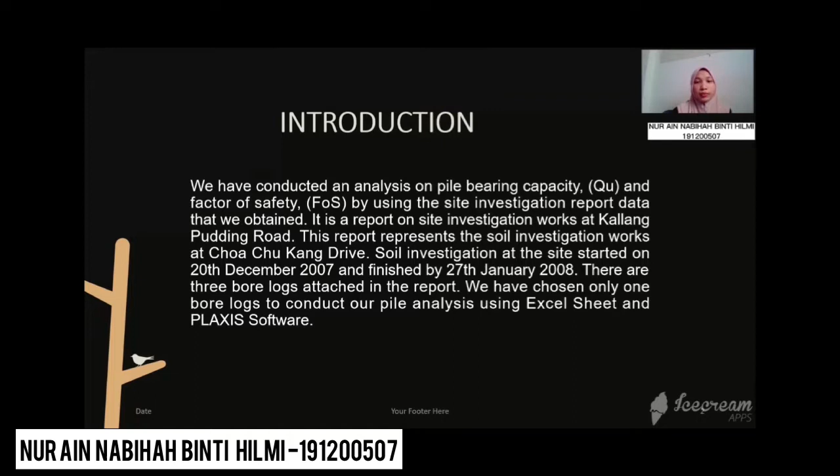Objective. Our aim in conducting this pile analysis is to explore and utilize our site investigation data in order to find pile bearing capacity and factor of safety.

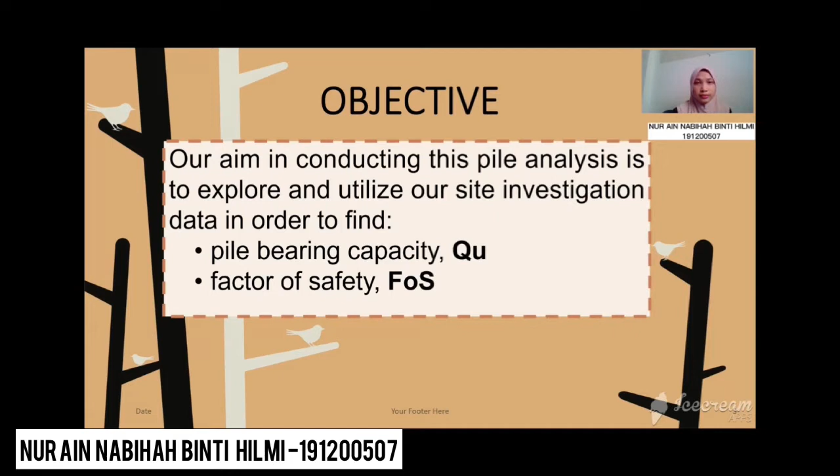Equipments. There are 2 software we use in this analysis, which is Excel sheet and Plaxis software. The reason we use this software is because it is easy to use and accurate.

Plaxis is the leading geotechnical engineering simulation software developed specifically for deformation analysis of soil and rock. Renowned for ease of use and accuracy, it helps us optimize our design more effectively than applying traditional conservative calculation methods.

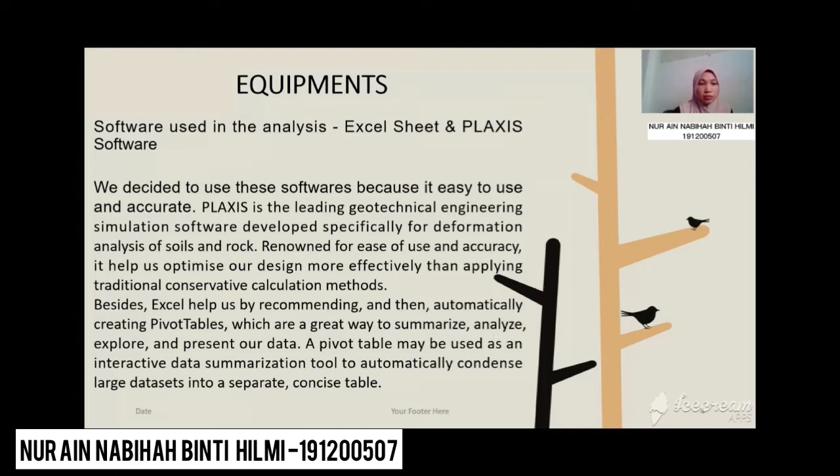Besides, Excel helps us by recommending and automatically creating pivot tables, which are a great way to summarize, analyze, explore, and present our data. A pivot table may be used as an interactive data summarization tool to automatically condense a large dataset into a separate concise table.

For manual calculation, in order to find Q ultimate, we are using the Meyerhof method in SPT. But first, we need to know the value of N60 so that we can substitute it into the Meyerhof equation in order to find QP.

The fav value for the high displacement driven pile also needs to be calculated. Then the value of end bearing capacity QP can be calculated using step 6. Then the shaft friction QS and the end bearing capacity QP can finally be calculated in order to find the Q ultimate.

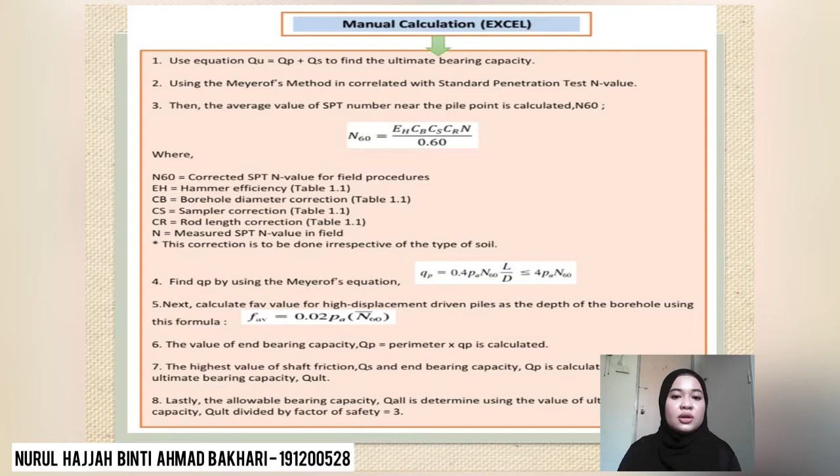The Q allowable, Q all, can also be determined by dividing the value of Q ultimate by the factor of safety, which is equal to 3.

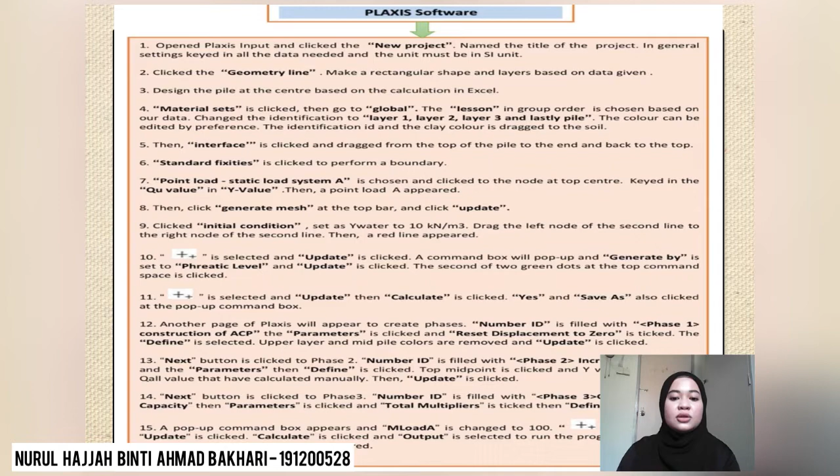Next, we apply initial conditions and update the calculation. Define groundwater level and define phases so that we can generate the mesh. Then apply load at the nodal point so that we can analyze the result, and the result will come out.

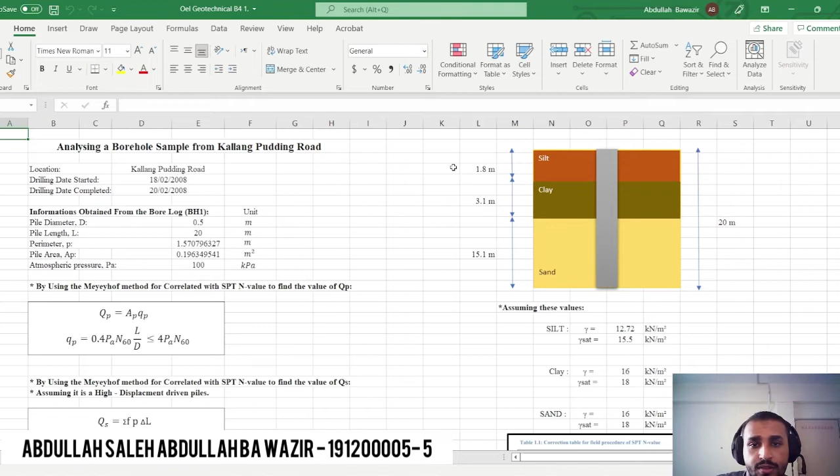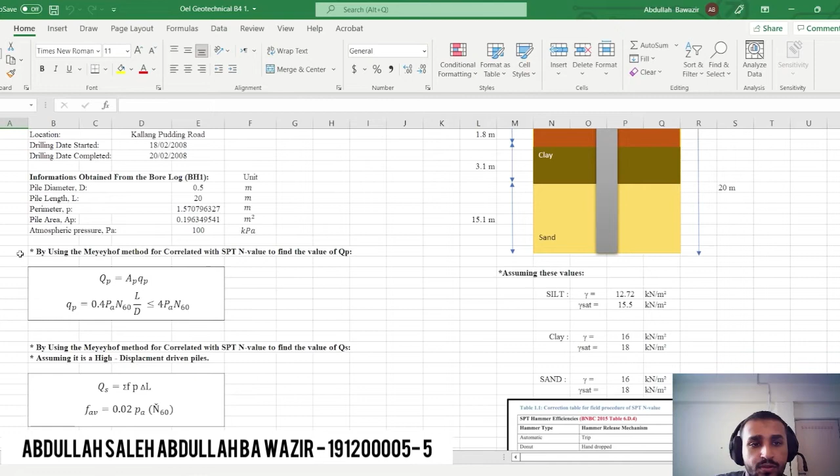And here's the parameter of our soil based on the SI report. Based on the data given, we need to use the Meyerhof method correlated with SPT N value. Here is the formula, and this is for QP.

And for QS, we will use the same Meyerhof method with SPT N value. This is the formula. Here is the formula for finding N60 and N corrected 60.

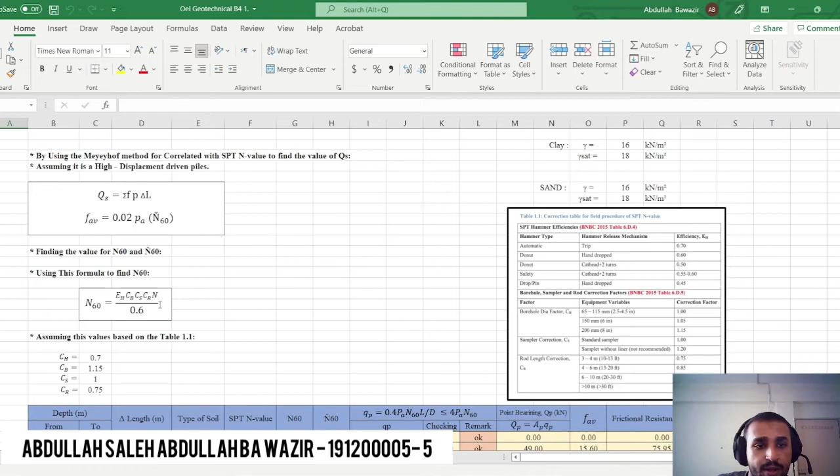And for the above value, we assume it here based on this table 1.1. After that, we plug all the formulas into this table for depth, the different layers and type of soil, SPT N value, N60, and N corrected 60.

We found here, we do the checking. Suppose this one to be bigger, then all of it is okay. And we found the value for qp and F average, and after that we found the frictional resistance, and here the ultimate bearing capacity.

Based on this, for the total point bearing capacity, we get it from this one, and for QS from here. For Q ultimate we will plus this value and this value. And after that, for factor of safety of 3, we just divide this one by 3, and we will get this value.

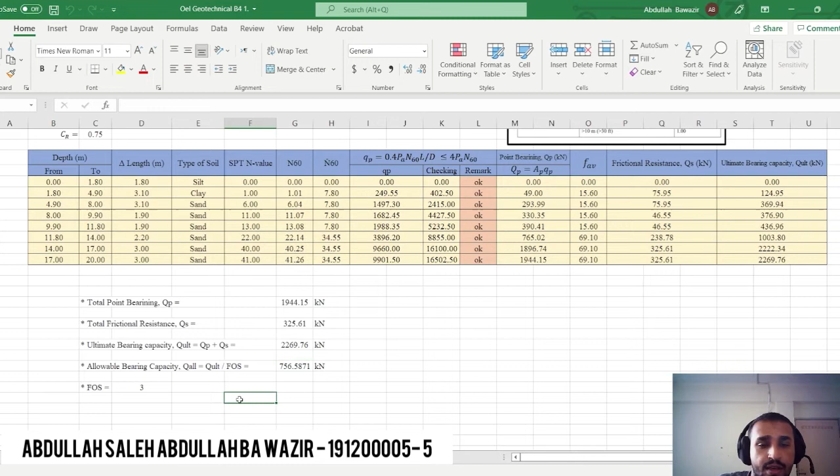Hi everyone. Today we are going to talk about the Plaxis analysis.

Currently, we are using Plaxis 2D to analyze the pile bearing capacity QU. Plaxis 2D is a geotechnical analysis software which can be used to determine the total displacement, effective stress, total stress, and so on for the soil. But today we are focused on the pile bearing capacity.

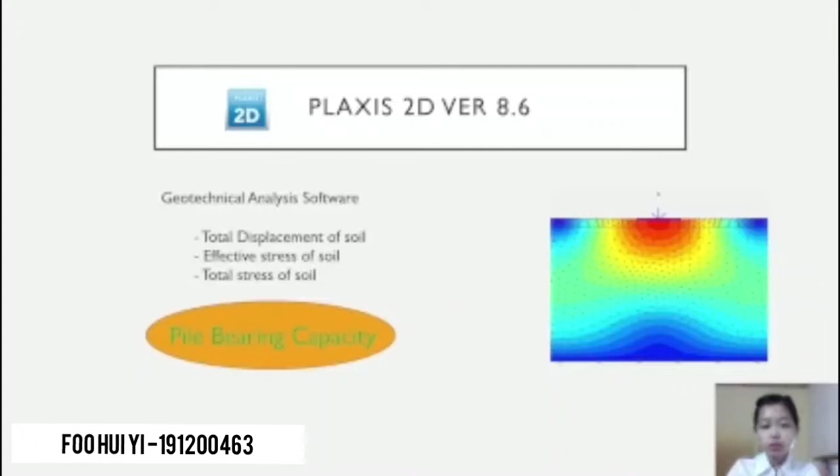First, we need to draw the model of the pile and divide the soil into several layers as shown in the figure, based on our SI report.

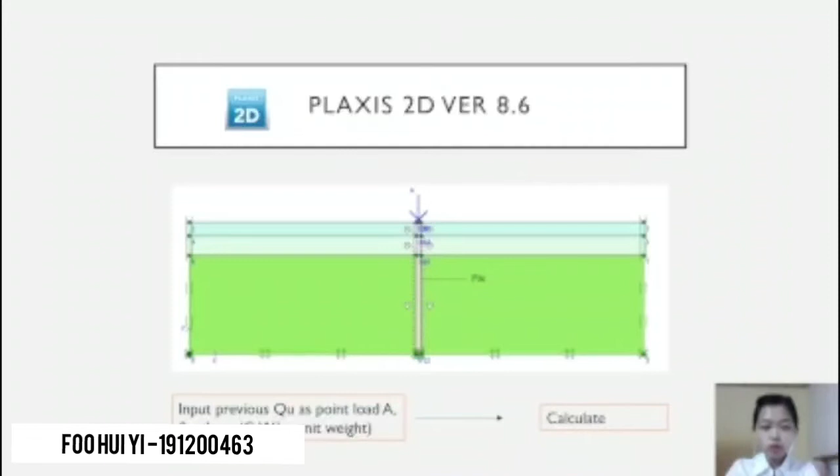Next, we need to input the estimated bearing capacity value from previous manual calculations and other required components such as groundwater level, unit weight of soil, and so on. After that, we start to calculate.

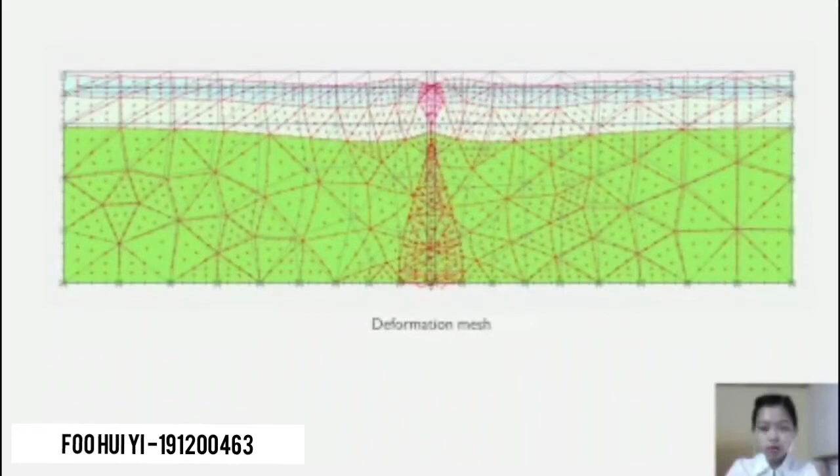By generating the deformation mesh, it shows the deformation that occurs due to the reaction and soil stress in the soil, as shown in the figure.

Besides that, we can also find the total stress reacted on the pile, as shown. If you are not satisfied, you may refer to the table to check the stress at a particular point.

In our analysis, we trace the vertical total stress, sigma yy, from the soil at the bottom of the pile and multiply it with the affected area of the pile to obtain the point bearing capacity QP.

Meanwhile, we trace the horizontal total stress, sigma xx, from the soil at different layers reacted onto the pile, multiplied by the affected area of the pile separately for different layers, to obtain the frictional resistance Qs.

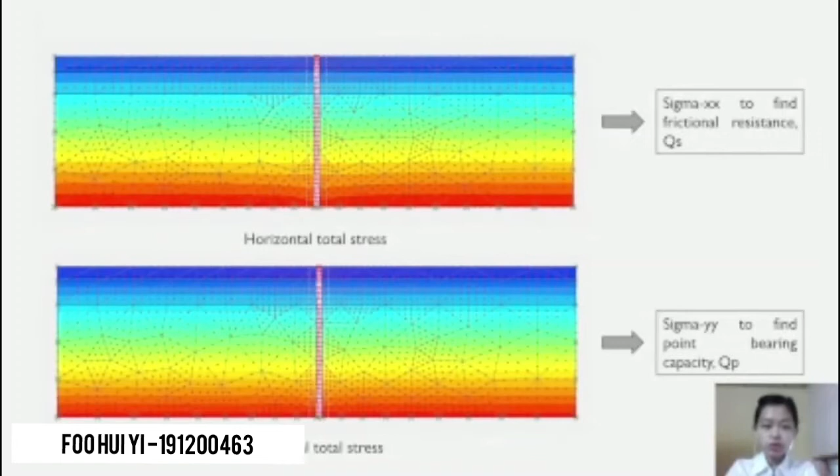This is the flow of the whole calculation. So after we obtain the Qs and Qp, we sum up the values of Qp and Qs to obtain the pile bearing capacity Qu. That's all for the analysis.

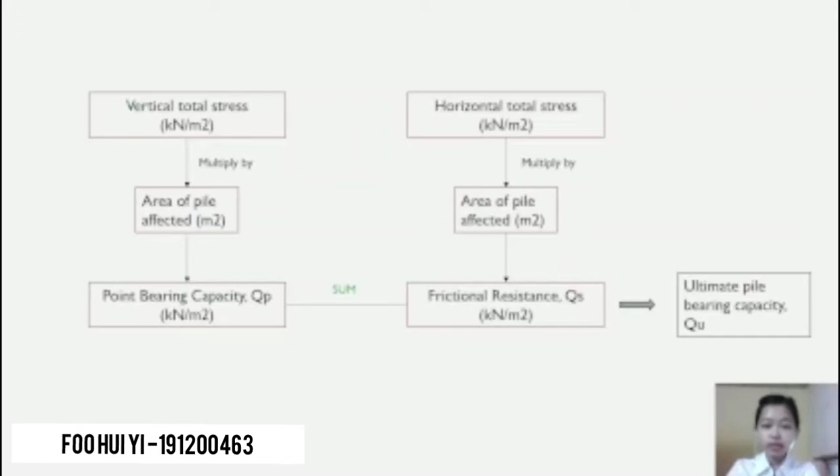Today I want to present about the result and the discussion.

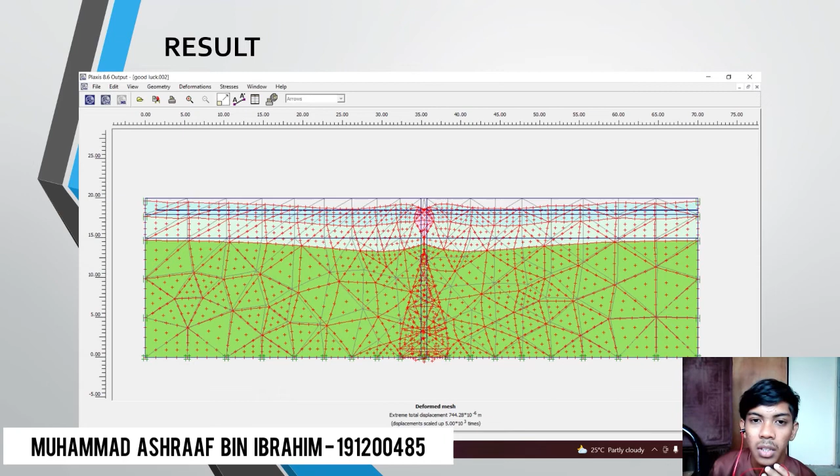In the discussion, we can determine that the soil contains silt, clay and sand at a depth of 20 meters, based on data from the SI report in the borehole log.

We can retrieve the results of the deformation of soil, total stress, total strain, and other factors involved in pile and foundation building utilizing Plaxis software.

The overall displacement for the pile is 744.28 times 10 to the power of negative 6 from the surface, according to our distorted mesh result.

As a result, the pile was deep due to soil that could not sustain the complete bearing capacity applied to the pile, and the sand was also too soft for the pile.

The total stress around the pile was the highest, particularly at the lowest part.

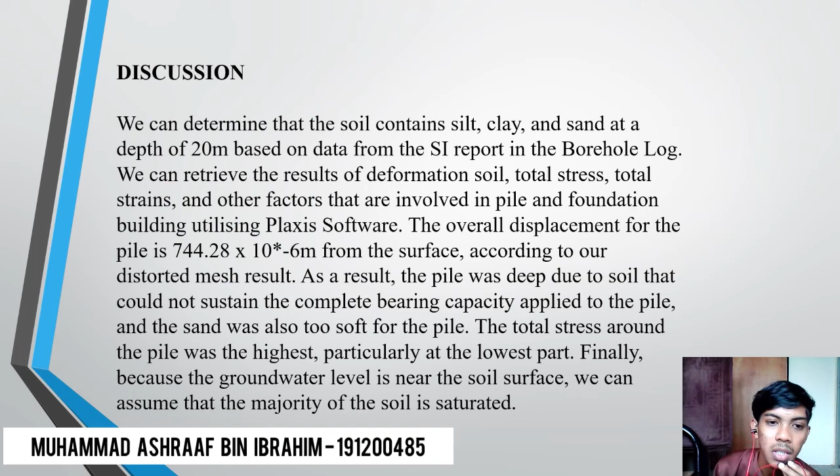Finally, because the groundwater level is near the soil surface, we can assume that the majority of the soil is saturated. Thank you.

In conclusion, the objective of analyzing pile bearing capacity using Plaxis software and Excel sheets is achieved, and the method is found to provide reasonably accurate results.

The value of ultimate bearing capacity estimated by the Excel sheet is 2,269.76 kilonewton, while Q ultimate generated by Plaxis software is

246.24 kilonewton. So the percentage error of Q ultimate between these two methods is 89%, which is quite high.

It's because Plaxis does not determine the exact solution, because if it were able to determine the exact solution, then we would not need to tolerate any error.

Besides, Plaxis tries to reach equilibrium between the sum of the external forces applied to the models, like loads and weights, and the integral of internal stresses in the soil and structural elements.

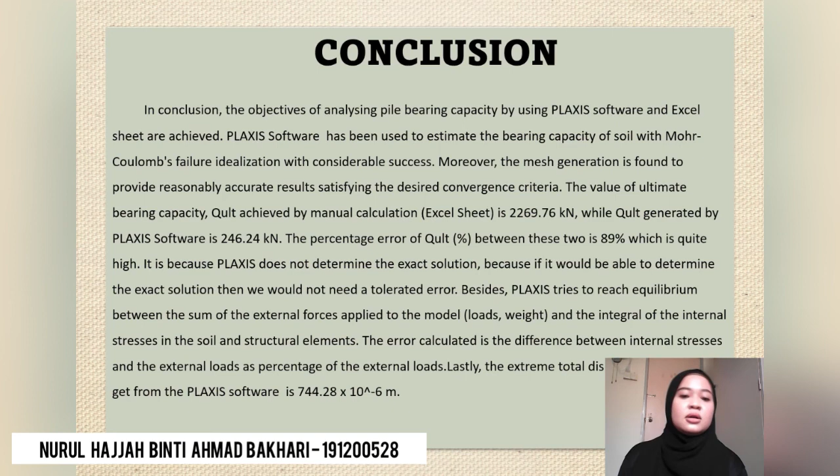So let's say the extreme total displacement that we get from the Plaxis software is about 744.28 times 10 to the power of negative 6 meter. That's all from me. Thank you.